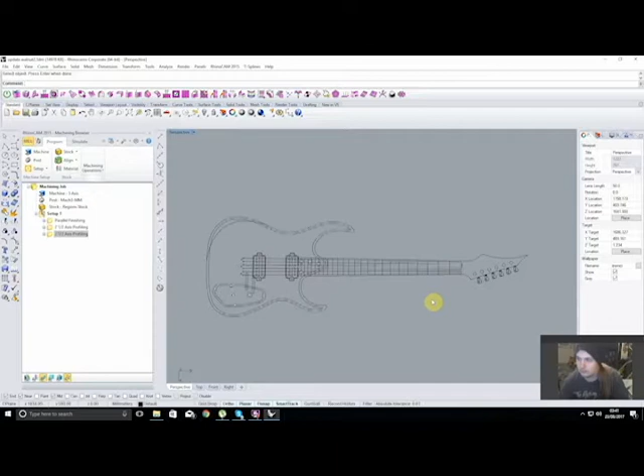So this is the guitar that I was making. It's pretty much done now, but I've been taking quite a bit of footage throughout, especially the neck build, and I'm going to be placing that in this video. I don't know how well it's going to transition because I'm not a professional video editor, but it'll get the job done.

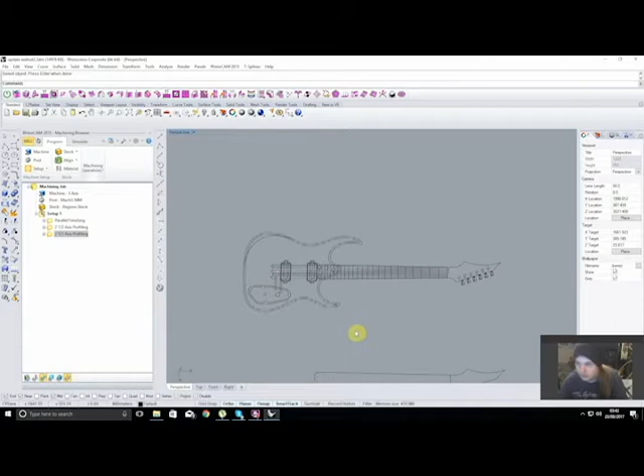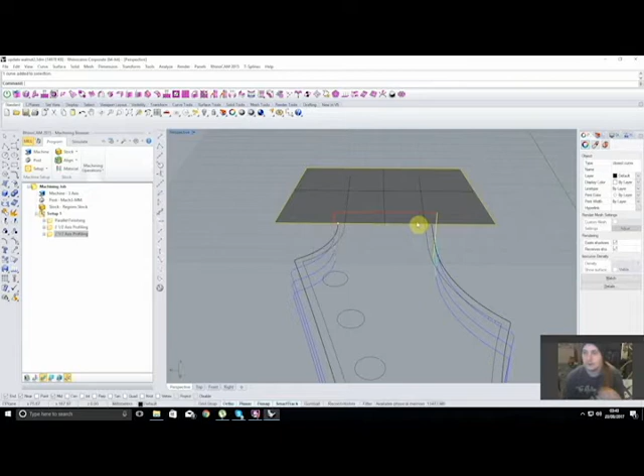So the CAD and CAM for the headstock section is actually really simple. I started out with the headstock shape, and with that came my nut line. From that I drew a rectangle which was as wide plus a bit of excess, to cover the entire blank, and as long as the scarf joint surfaced before it started digging into the spoil board.

From there I'll show you now. I just click surface, planar curve, and it gave me that surface. From there I generated a parallel finishing.

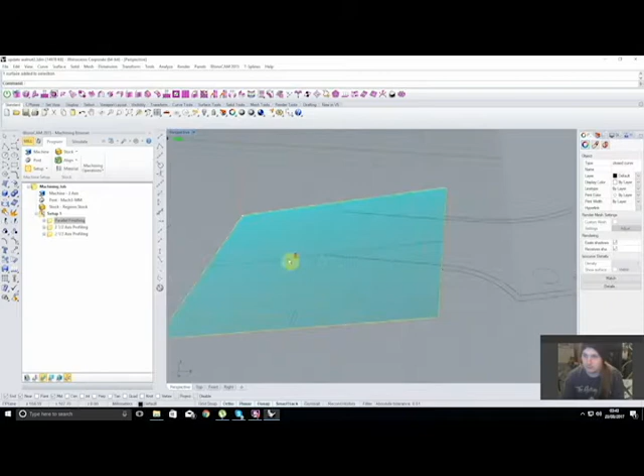Of that surface, and then you can go ahead - this was for the binding channel. So with the binding channel I bring it out so it cuts all the way through the scarf. You would then draw your tuner holes, and then you do the final shaping of the headstock.

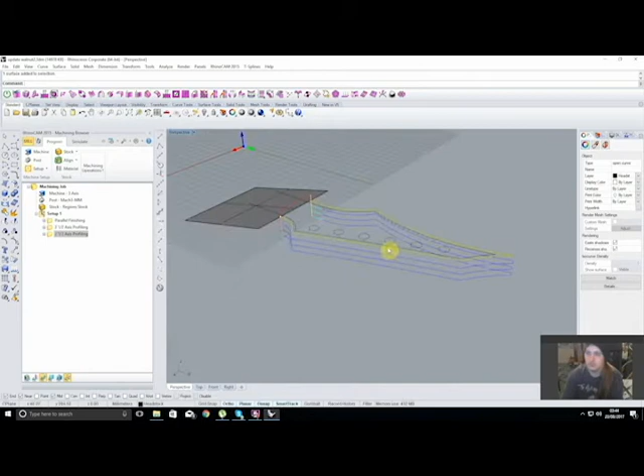I don't actually thickness my headstock blanks after they've been cut from the neck blank. I leave them at full thickness. The benefit to this is that I'll do my headstock profiling, and you won't have any waste material that flies off - it comes off when you do the back carve.

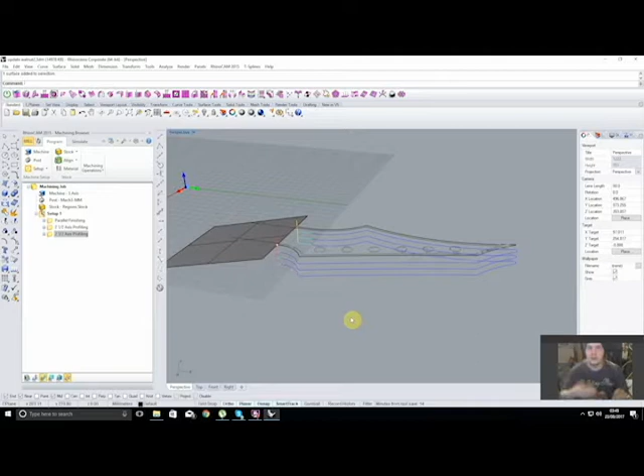However, the downside, I guess, is that you end up with a scarf joint that's further down the neck than a normal guitar. I try to aim for about the 2nd fret where my scarf joint is, because I can put a nice piece of opposing colour laminate in there, and it really shows off that scarf joint. Some people seem to have an issue with it, thinking it might swell in the future and stuff like that, but not that I've noticed anyway.

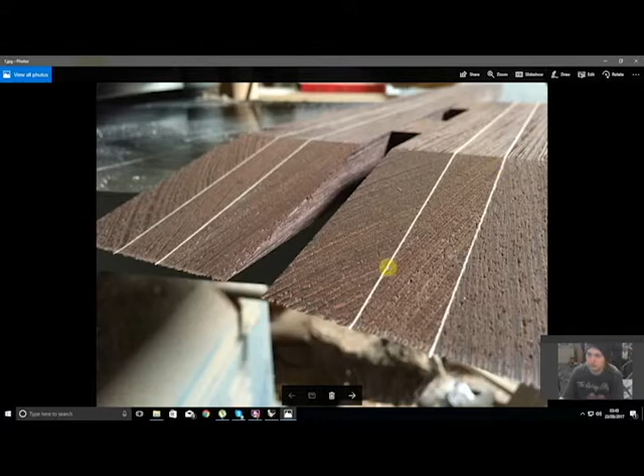So this is the headstock and the neck scarf joint straight off the table saw. This is what I mean by rough cut. My table saw jig is essentially just a big fence at a set angle that I made out of a bunch of MDF. I laminated it all together and cut it square.

I pinned it to a board because it can rotate from like a 10 to a 15-degree angle and stuff like that. But you can get quite creative with them, you don't need to be. Again, this is straight off the table saw, so this is kind of step 1.

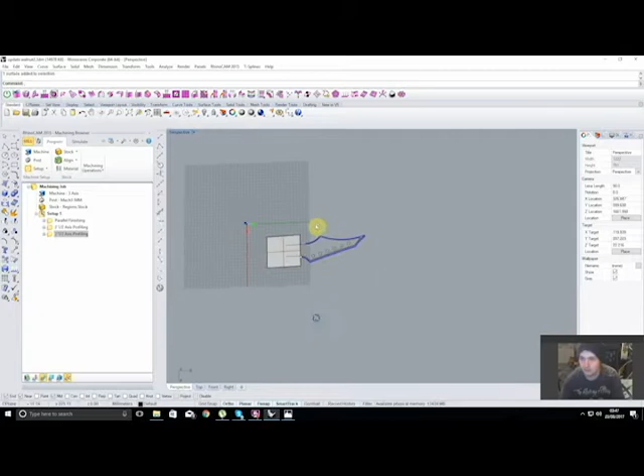So let's say that this is my center line and my nut line is here.

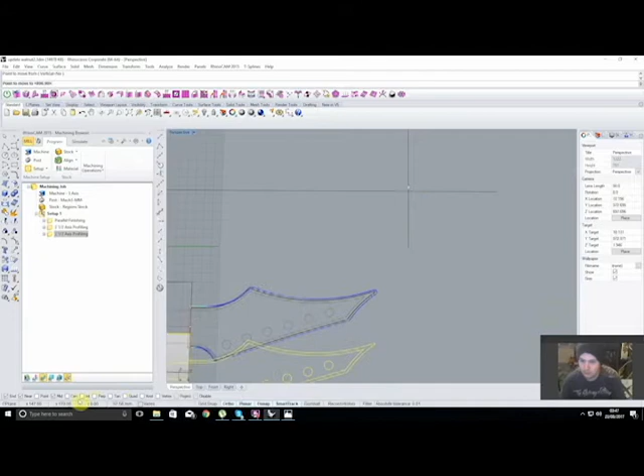I will engrave this onto the table, and then I will align everything up to that. And then the neck is done the exact same way, it's just of course opposite.

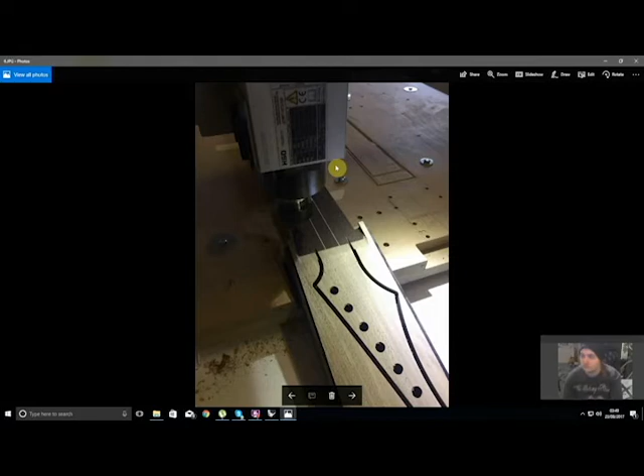This is step one of the milling. Again, this is just masking tape and super glue, not the final blank. I'll drill two pinholes, one here and one on the other side, which I use for aligning when gluing the neck blank together. They make it so much easier - I'm not sliding around with clamps and glue trying to make sure the veneers line up. I've got two pinholes that are pretty much dead on, a slip fit, not hard to get in because you need to get them back out.

Word of warning: don't leave your pins in whilst the glue is setting. You'd be surprised how well wood glue sticks to metal.

So these are the two pinholes that have just been drilled, essentially. Nothing more to really say there. Again, just make sure your veneers are spot on before you go ahead and drill these two pins.

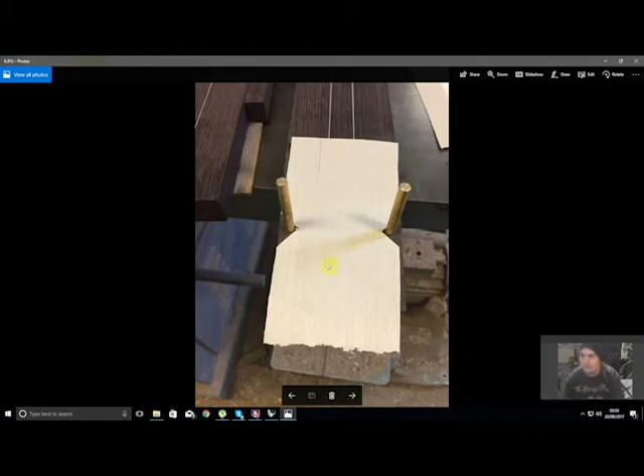I can CNC brass. This is the maple laminate that I put between the two scarf joint surfaces. You can't see it now, but it essentially turns into an arrow shape once it's milled. You'll see that later in the milling video - I think it looks really nice, so I do that, but it's an extra step, you don't need to do that.

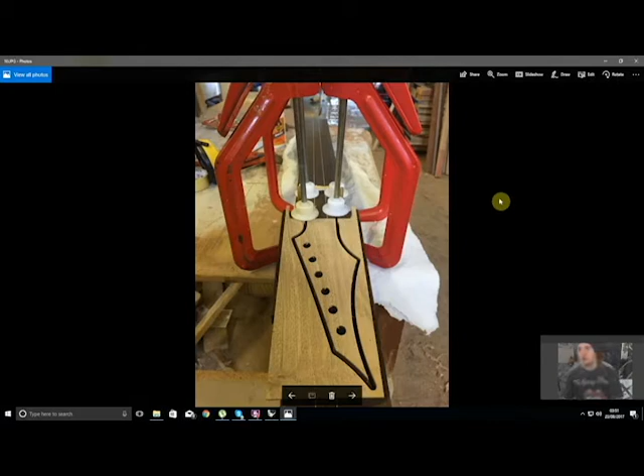So this is the final glue up. I know the clamps aren't the best ones to use, but as long as your scarf joints are really well done, you won't have any issues no matter what clamps you use.

One thing to mention, I do carefully sand the scarf joints after they've gone on the CNC, just to take any tool marks out. I get the joint as perfect as possible.

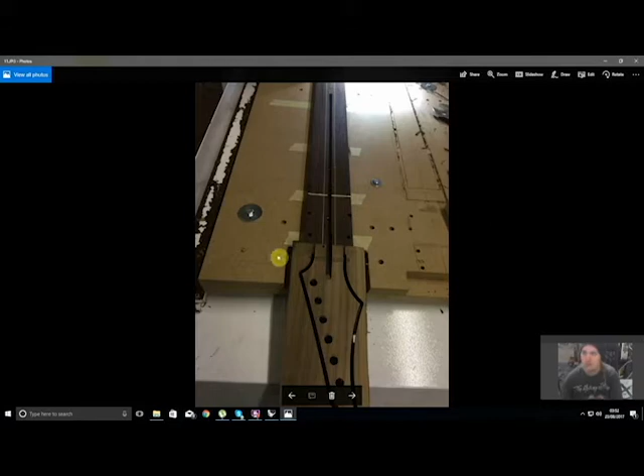After the glue up, I'll take the blank, again masking tape and super glue it onto the CNC machine, then come in with a fly cut that will cut probably 1mm off the entire neck blank, including the scarf joint. I leave my stock slightly oversized for that fly cut.

I will then take the blank off the CNC machine, and then really carefully, now that everything's flat, I can align the new nut line, because the fly cut will push that nut line back. I'll align that up with my marks on the table, and I'll align the center lines with the center lines on the table as well.

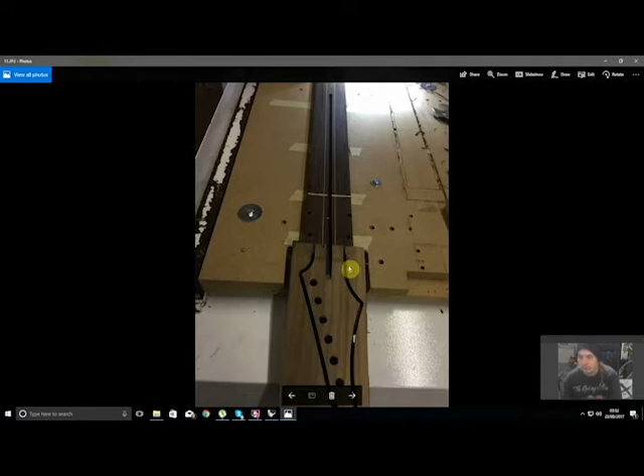And then from there, I go ahead and drill my locating pins, my truss rod, my nut slot. This is about 1mm deep. It's because I like my nuts to be on the angled headstock itself, so it needs a flat surface to do that.

So there isn't a particular place where I set the pins to be inside a Rhino. I just make sure that they don't collide with any other pins and they're within the limits of the stock.

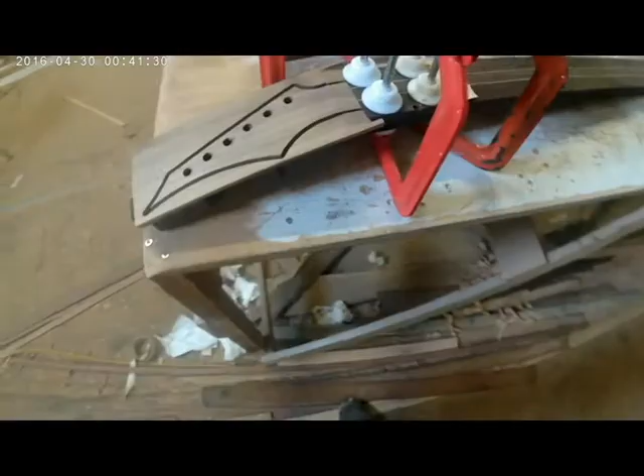So here's a quick little video of the glue up taking place and the pins that are used to align the glue up. Again, don't glue the pins in - they really like to stick to the wood glue.

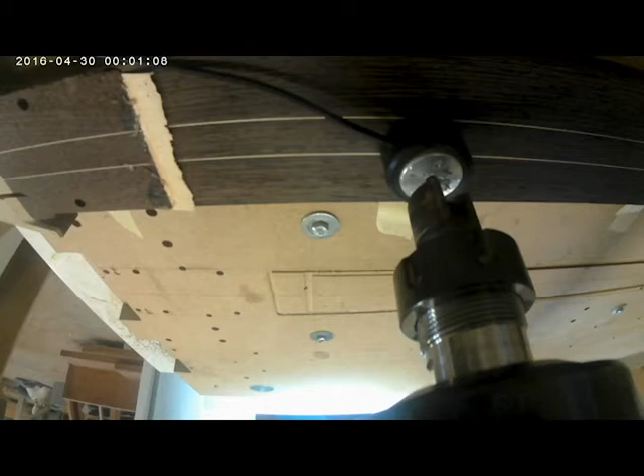So now that the blank is all glued up and everything, it goes onto the CNC. I don't bother about placement very much, as long as it's roughly on the center line. This process is the fly cut.

I use a 25.4, I think, yeah, a 1-inch cutter essentially to do the fly cut. I would like something bigger, but as you can see, my tool park is only 1 inch. So if I got anything bigger, I'd have to eyeball the Z height and everything.

My tool paths for this were a bit wasteful. I ended up just drawing a rectangle that was much bigger than the blank itself, just to make sure. But of course you can do it more carefully than I did.

Hopefully you can now see how flush the overall joint is. Again, I will then take the whole stock off of the CNC, going off the new nut line that has been pushed back. I will then position it onto the CNC for the rest of the operations.

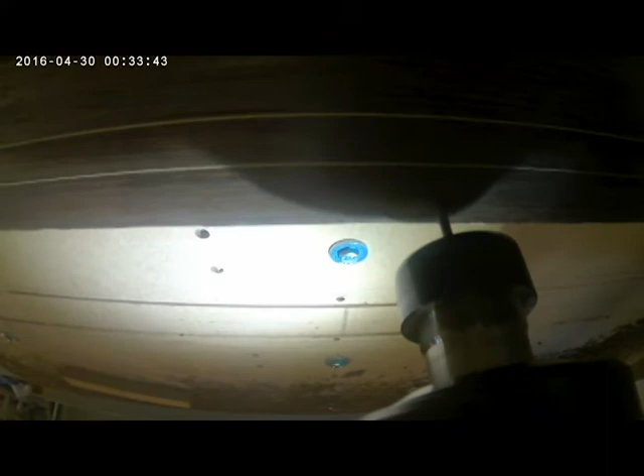So here's the video on the next operation. Again, I've relocated the stock onto the CNC, making sure that the nut line matches up and the center line. The CNC will then go and drill the 4 locating pins, which I'll use to flip it onto its back to do the actual neck carve. This operation will also do the nut slot and the truss rod slot.

Drilling, but for the actual slotting, I would go for either a straight flute or a down cut, especially in woods like wenge, which tend to splinter. They will really splinter up.

You can see this upcut cutter really ripping through that material. That's one great thing about the upcuts, is they do plow through material very fast, but they do have a slight issue with the actual surface finish, especially in woods. For these operations now, I use a straight flute cutter like you would for a regular router.

I've now switched over to a 3mm cutter, I believe it might be a 2, but this one just does the little locating pins for the fretboard. The same holes are on the back of the fretboard.

And as you can see, I'm now test fitting the fretboard just to make sure that they line up with the locating pins properly.

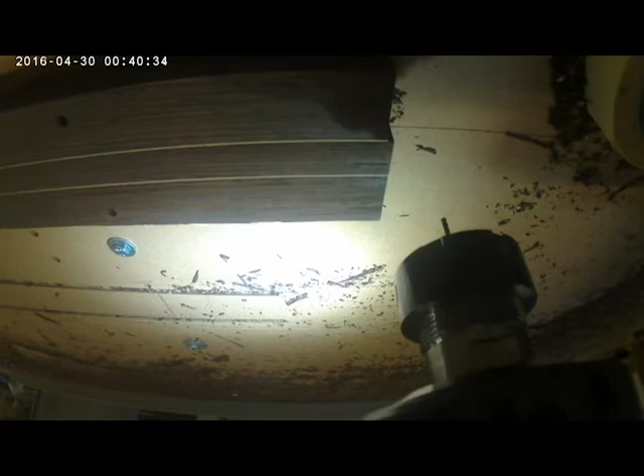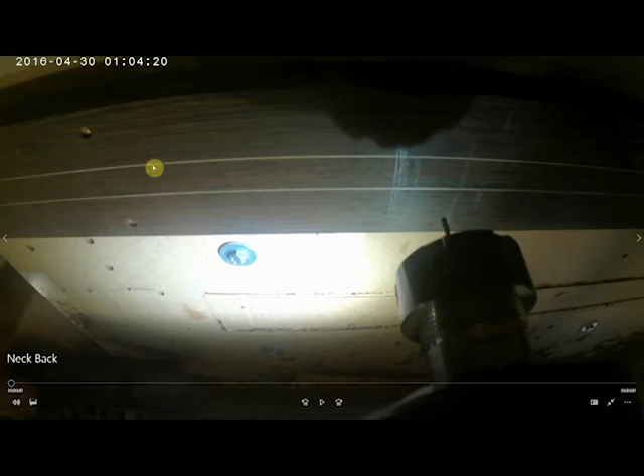Now for the most exciting part, you can see that I've flipped the entire blank onto its back using the new locating pins. This process is essentially the entire neck back.